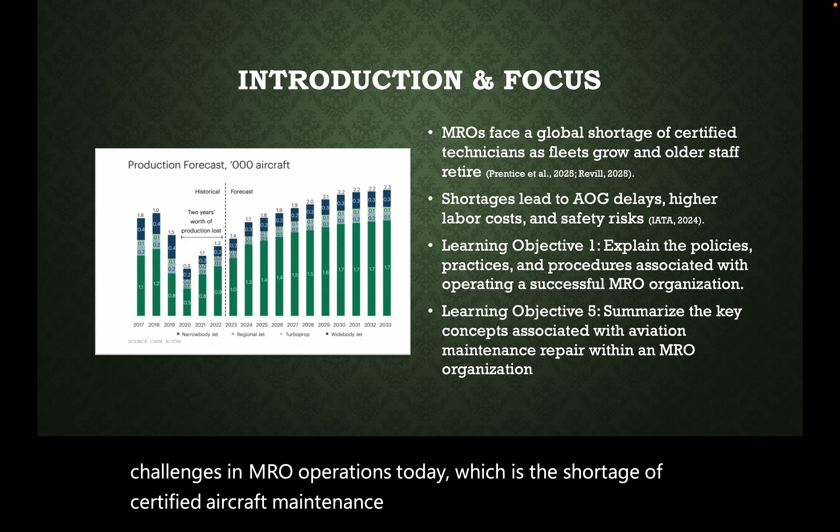In this presentation, I'm exploring one of the most urgent challenges in MRO operations today, which is the shortage of certified aircraft maintenance technicians. I chose 2 learning objectives from this course to frame the problem. The first taught me about the policies, practices, and procedures that keep an MRO organized and compliant. The 5th focused on recruiting, training, and retaining the workforce that actually carry out the work. These 2 concepts go hand in hand.

A company can have great policies, but without enough skilled technicians to use them, aircraft will still sit grounded and delays will build up. My perspective is that this course showed me how vital it is to balance solid processes with investing in people if we want MROs to run efficiently and safely.

The workforce gap is not theoretical, it's already here. The FAA reported that almost a third of the United States A&P workforce will retire by 2030, while far fewer new licenses are being issued to replace them. I also learned that when senior technicians leave, it's not just about losing numbers. We lose decades of hands-on problem-solving experience that can't be replaced overnight.

In 2023, some safety alerts were linked to inexperienced staff making errors during heavy checks. That highlights how skill gaps can affect both safety and turnaround times. My perspective here is that this learning reinforced for me that MROs need to act now, not just to fill headcount, but to capture and transfer the know-how of the experienced staff before it's lost.

Right now in 2025, the Aeronautical Repair Station Association study shows MROs are already short tens of thousands of technicians worldwide. The Aviation Technician Education Council's 2024 pipeline report predicts about a 20% shortfall in technicians by 2028. That means we're heading towards a serious bottleneck as fleets expand and maintenance demand rises. Labor costs already make up 30 to 40% of MRO budgets, so as shortages grow, overtime and outsourcing drive those costs even higher.

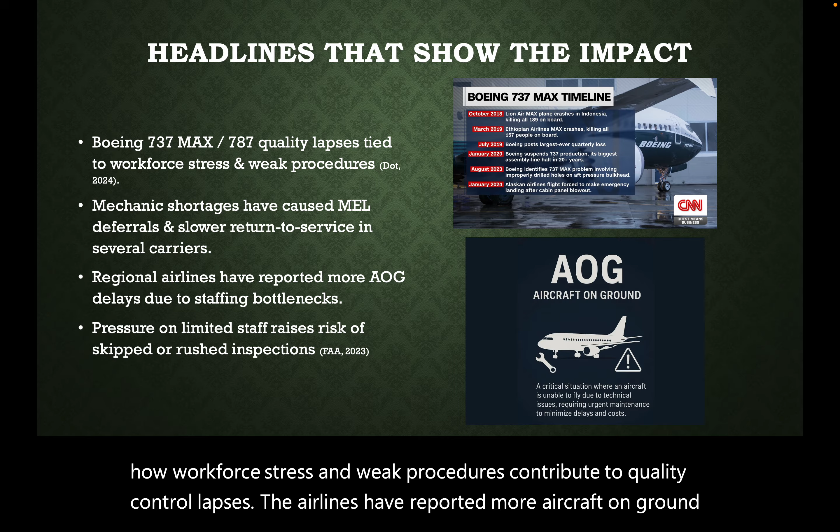Investigations into Boeing's 737 MAX and 787 programs revealed how workforce stress and weak procedures contributed to quality control lapses. Airlines have reported more aircraft on ground delays and deferred maintenance because they simply did not have enough certified mechanics available. Short-staffed teams working long hours also raise the risk of skipped or rushed inspections, which is a direct safety concern.

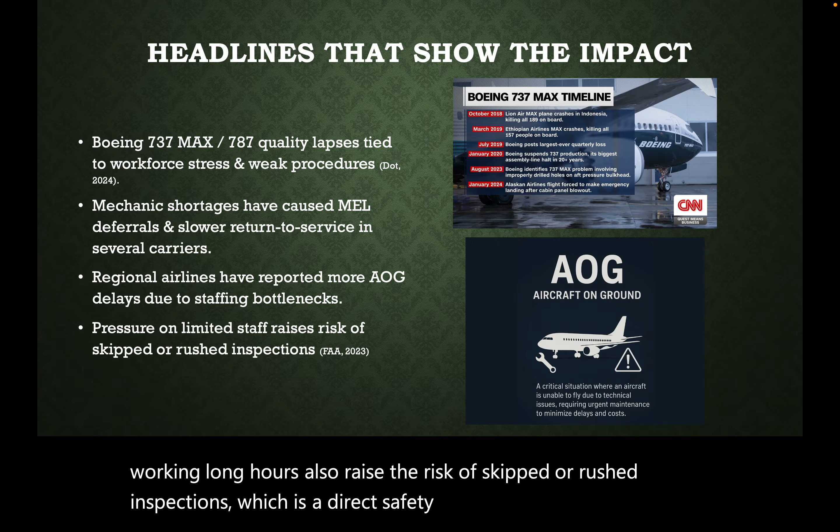In my perspective, this reinforced what I learned about quality systems. Learning Objective 1 showed me how quality assurance and quality control procedures help reduce human factor lapses even when staffing is tight.

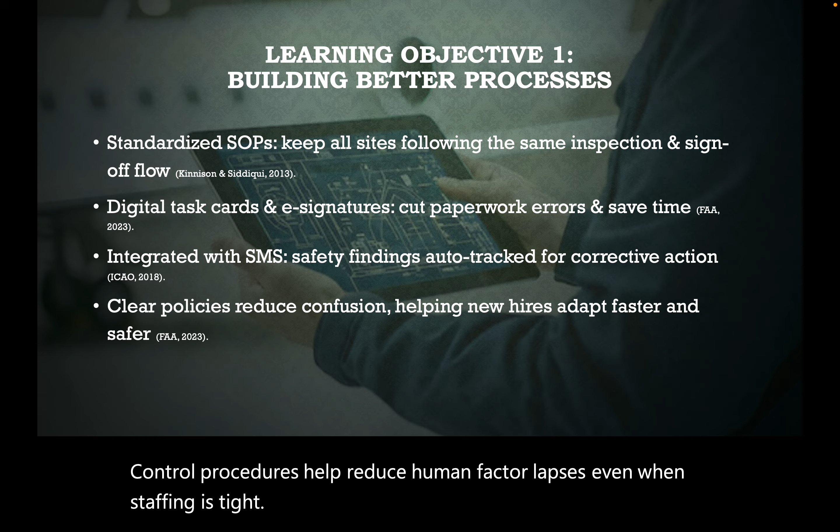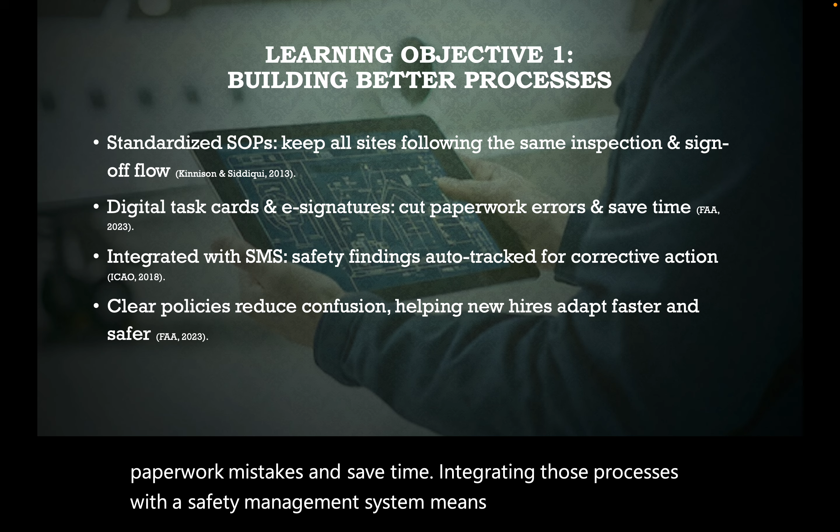Objective 1 taught me the value of strong standard operating procedures across all shifts and bases. I found that using digital task cards and e-signatures can reduce paperwork mistakes and save time. Integrating those processes with a safety management system means findings and corrective actions are tracked automatically, improving compliance. I feel like these practices showed me how efficient procedures help new hires become more productive more quickly, which is especially important when the workforce is young or inexperienced.

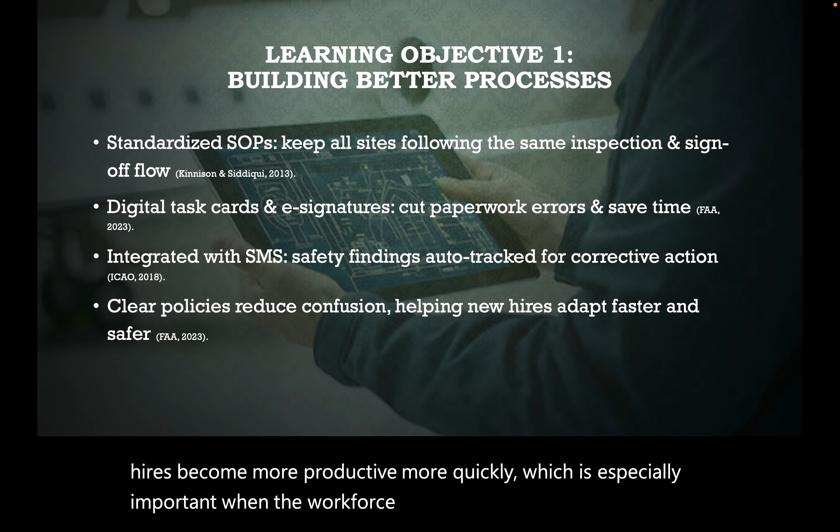A good example comes from a U.S. airline that reduced its C-check turnaround time by roughly 12% after streamlining standard operating procedures and switching to digital work packs. I learned that documented steps also helped apprentices certify about 25% faster since they had clearer guidance.

An Asia Pacific MRO even passed an EASA 145 audit on the first try largely because of consistent procedures. I think this proves strong standard operating procedures don't just save time and money, but they build trust with regulators and improve audit readiness.

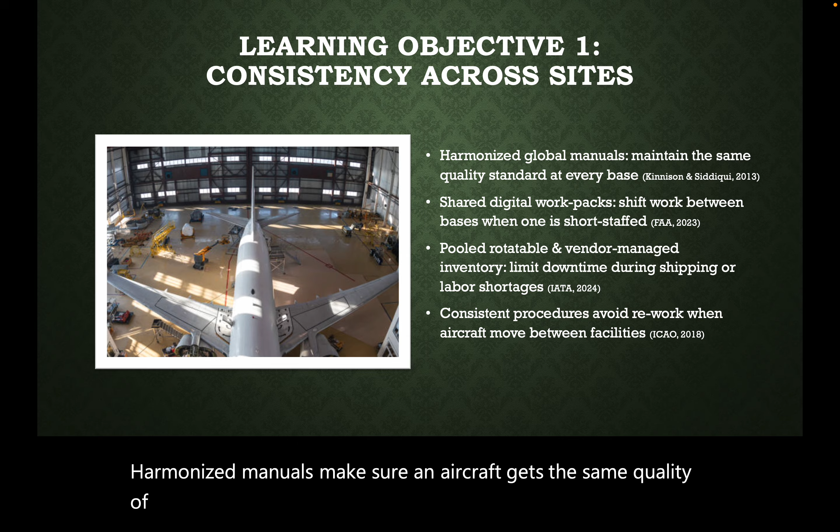For large MROs with multiple locations, consistency really matters. Harmonized manuals make sure an aircraft gets the same quality of work no matter which hangar it's in. Shared digital work packs allow managers to shift tasks to another base if one site is short on staff. I think they showed me how standardized procedures make it easier to move people and work around without sacrificing safety or quality.

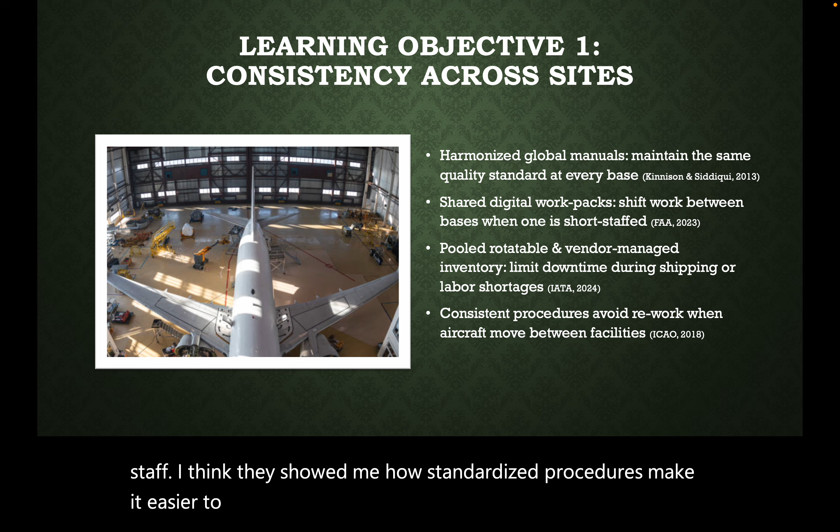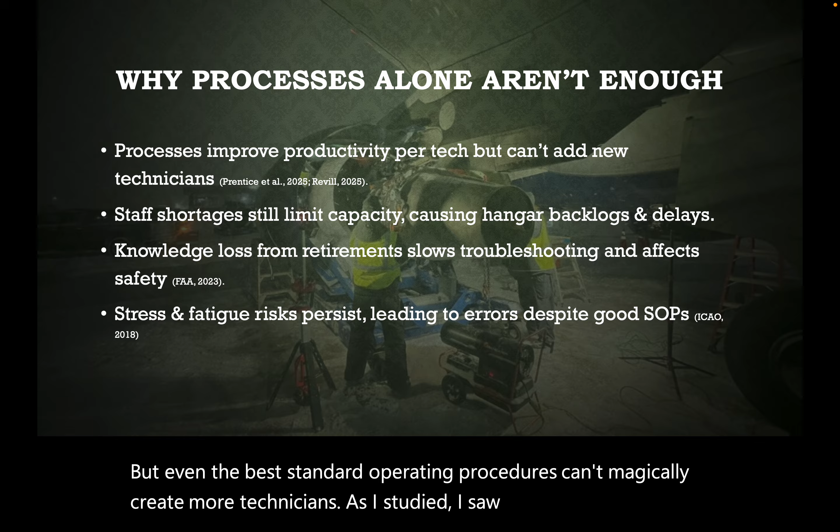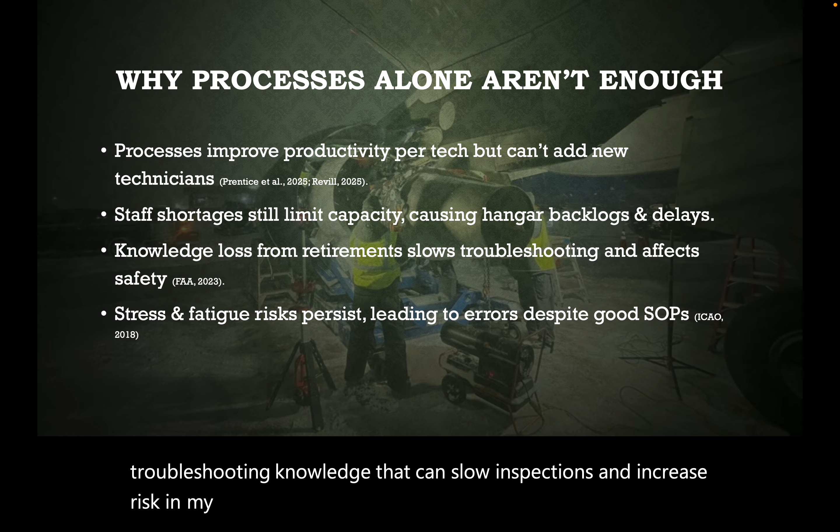But even the best standard operating procedures can't magically create more technicians. As I studied, I saw that crew shortages still limit capacity and lead to backlogs and delays even when processes are efficient. Retirements also mean a loss of valuable troubleshooting knowledge that can slow inspections and increase risk. In my perspective, Learning Objective 5 showed me that to truly close the gap, we need to invest in recruiting, training, and retaining the workforce, because these processes can only take us so far.

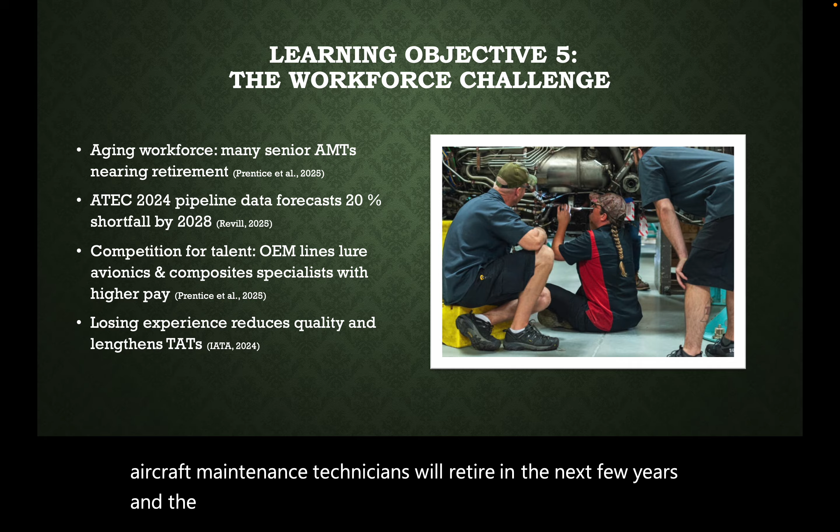Objective 5 also helped me understand why the shortage is worsening. The ARSA report warns that tens of thousands of senior aircraft maintenance technicians will retire in the next few years, and the ATEC pipeline forecast predicts that we'll be 20% short of new entrants by 2028. Competition from OEMs and other industries also pulls skilled workers away with better pay. These insights made it clear to me that solving the shortage requires better pay, better schedules, and clearer career paths to keep experienced staff from leaving.

I learned about some programs that are already helping attract new technicians. Lufthansa Technik's dual system apprentice program improved retention by about 15%, while Delta TechOps recruits over 700 military veterans each year, which is a great example of tapping into experienced talent. These partnerships with schools, veterans, and local communities are strategies I'd recommend because they build a stronger pipeline for the future.

With recruitment aside, keeping the workforce we have is just as important as the attraction of new people. Some MROs saw an 8 to 10 point drop in attrition simply by introducing tiered pay and retention bonuses. Adjusting schedules to reduce fatigue not only helps morale but also cuts down on mistakes. I think this taught me how even small improvements in pay, schedules, and mentoring can increase loyalty and preserve critical skills.

Another thing I found interesting is how technology is reshaping training. Augmented reality and virtual reality simulations cut engine strip training time by roughly 30%, letting new hires become productive sooner. Cross-training between skill sets also means one maintenance technician can fill in for multiple specialties, which helps when staffing is thin. I think this means that investing in modern training methods pays off by building skills faster and reducing expensive rework.